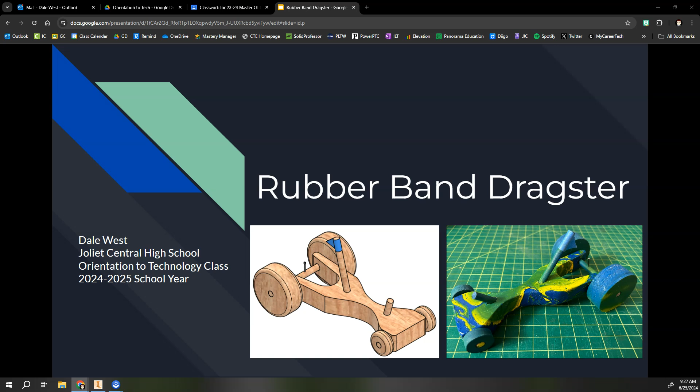So a quick overview to help the viewer know what to expect as they're moving through this screencast. First, I'd like to quickly summarize what the Orientation to Tech class is. This class is geared towards our incoming freshman students to give them a preview of many different vocational classes we have to offer here at Joliet Central High School. These students will have the opportunity to spend roughly 2 or so weeks in classes like photography, engineering and drafting, woods, automotive, computer maintenance and repair, electronics and robotics, metals, and welding.

My goal for this project is to build a rubber band powered dragster out of wood based on computer aided drafting blueprints which I created. I want to use this screencast to show you my project from start to finish, and I will share the skills I've gained, the troubles I faced, the results, and the modifications I had to make along the way. Finally, I will reflect on the project as a whole and share my overall thoughts.

This project first started in the engineering and drafting unit, where I was exposed to computer aided drafting, or CAD for short. I used the CAD software Autodesk Inventor to create a 3D model of the rear and front wheels. We followed a video tutorial to learn how to create 2D geometry and transform it into a 3D shape based on specific dimensions and criteria.

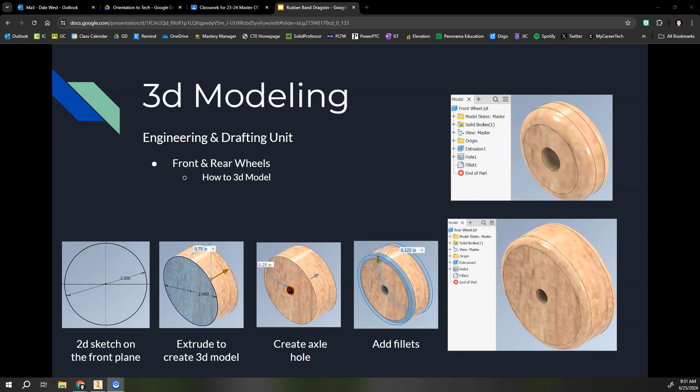From there, we moved into CAD drawings. After we finished that 3D model, we learned the importance of orthographic drawings and how they impact every industry in our world today. Everything we use or interact with today has to start with a detailed drawing before it's actually produced. These drawings make sure the product is meeting the expectations and is accurately manufactured.

I learned that an orthographic drawing typically consists of a front, top, and right side view. In addition to that, you'll typically see a shaded orthographic to help the viewer visualize the 3D object. Here you are seeing the dimension drawing I created of the front and rear wheels for my dragster.

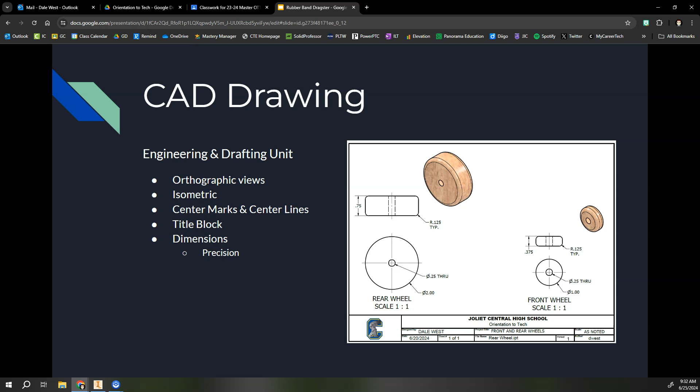I learned what center marks and center lines are for. I learned how to properly fill out the drawing title block. And finally, I learned how to adjust the precision of the dimension and how this can potentially add cost to the manufacturing process for this actual part or parts.

In the woods unit of the OTT course, we started to see the connection between the CAD from that drafting and engineering unit and the physical construction of the rubber band dragster in our woods unit. Here you're seeing me use the body CAD drawing to begin the construction.

I first used a chop saw to cut a 2x6 inch piece out of 3/4 stock. I then cut out the top view of the CAD drawing with scissors and traced the body design on the top of my piece of wood. I also realized why it's important to be able to read a tape measure here, because you really want to make sure that you're meeting the specifications of the CAD drawing.

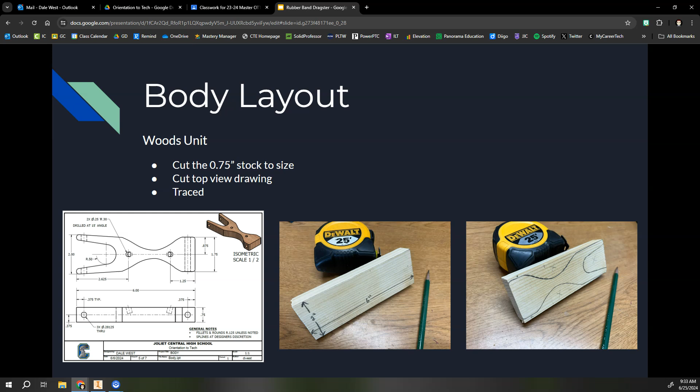Next, I used the bandsaw to begin making relief cuts for the curved portions of the design. This allowed me to easily cut these portions out on the bandsaw, since the blade cannot bend while cutting the curves. If you follow the images from left to right below, you can see the body design begin to develop, moving to the right, and then finally I was left with this.

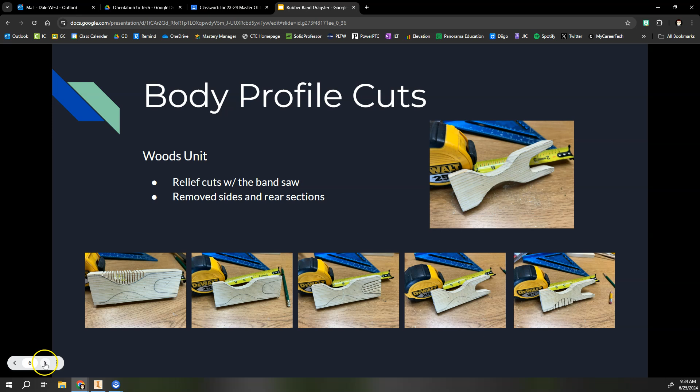Next, I used the paper cutout of the top view CAD drawing and placed it back on top of the wooden body. I then used a pointy object to transfer the center of the flagstaff and the motor pin holes to the top of the body, shown in the far left image on the bottom.

I also learned a little trick along the way, putting some painter's tape at a specific location on the 1/4 inch drill bit. Why did I do that? Because it helps me see how far I'm drilling down into the object and make sure I'm getting the desired depth given to me in that CAD drawing, so I don't go too deep. I then put the drill bit in a hand drill and eyed up a 15-degree angle to drill those two holes in the top of the wood.

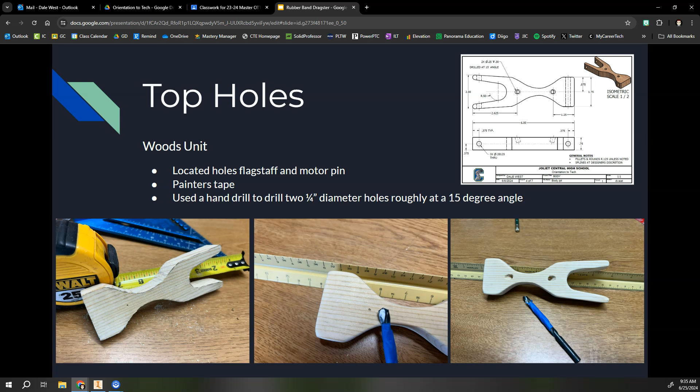Next, I used the front view of the body CAD drawing to help me determine the location and dimensions of the front and rear axle holes. I used this information to create a center mark with a pencil at a specific location to ensure my holes were exactly where they should be and met the CAD drawing specifications. I then used a 9/32 drill bit in a drill press and drilled the holes all the way through the body. I then tested some 1/4 inch axles that I cut to the correct length with a bandsaw, to ensure the wood would spin smoothly.

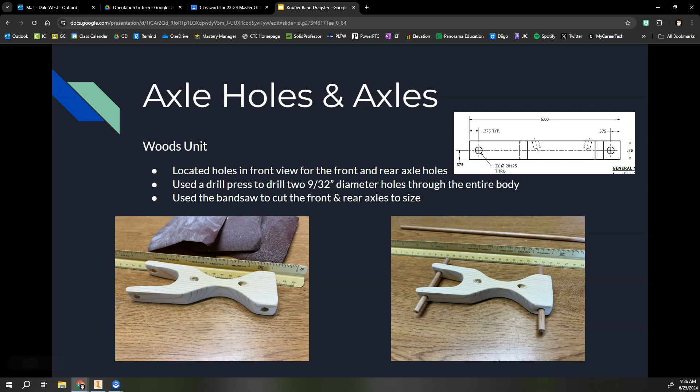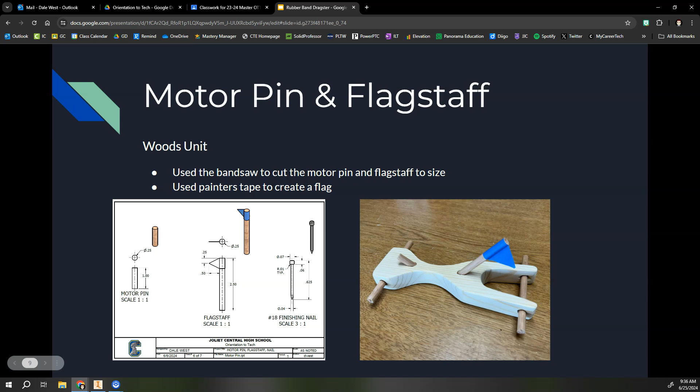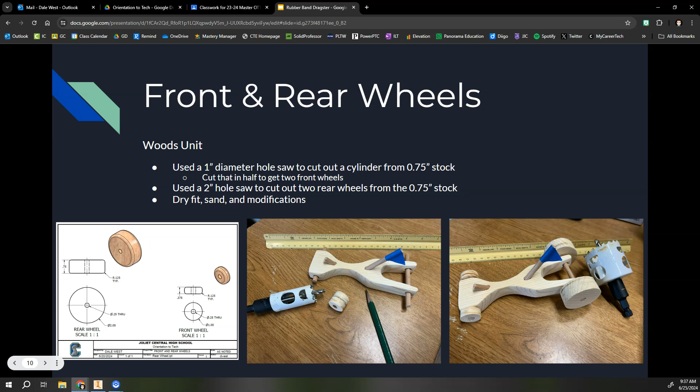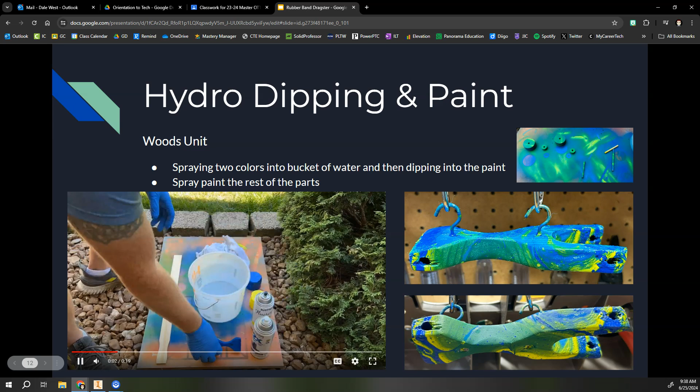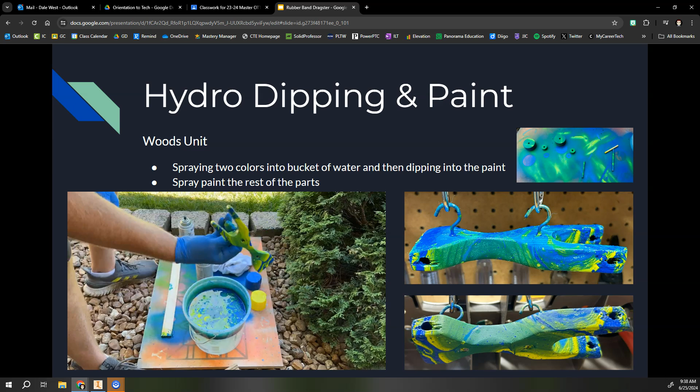Here you're seeing a quick time-lapse video of the hydro dip process, as well as the end results of the body on the right. In the top right, I just ended up spray painting the remaining parts. I did notice that after everything had dried, the parts were a little bit harder to assemble during the dry fit. Overall, I was very pleased with the outcome.

It kind of created this cool tie-dye kind of look. I was trying to get more of our school colors, blue and gold, but I did notice that as those rings started to intersect one another, when you start mixing blue and yellow, you do start to get a little bit of green. But overall, I was very happy with it.

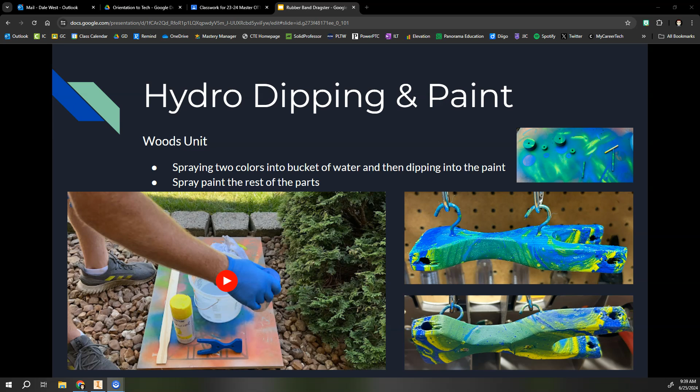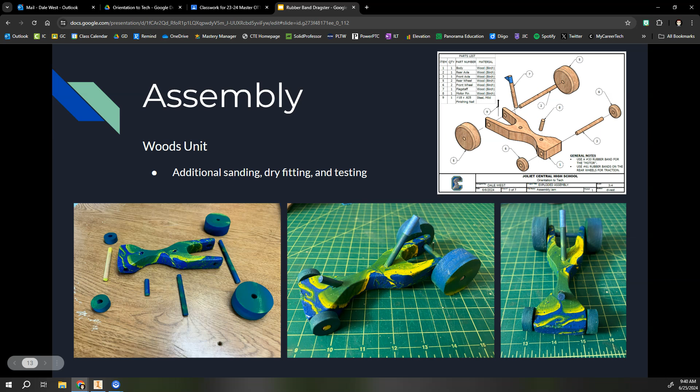I then thought, what type of material are vehicle tires already made out of that we drive around every day? Rubber, right? So what are the materials made out of rubber that I could easily access and make a modification to my dragster? I decided to add some rubber bands on the back tires.

I found that I actually had to wrap a few more strips of electrical tape because the rubber bands were a little small and weren't staying secure onto the rear wheels. By wrapping the electrical tape around a few more times, it made the tires a little bigger in diameter and allowed those rubber bands to fit nice and firmly around the tire.

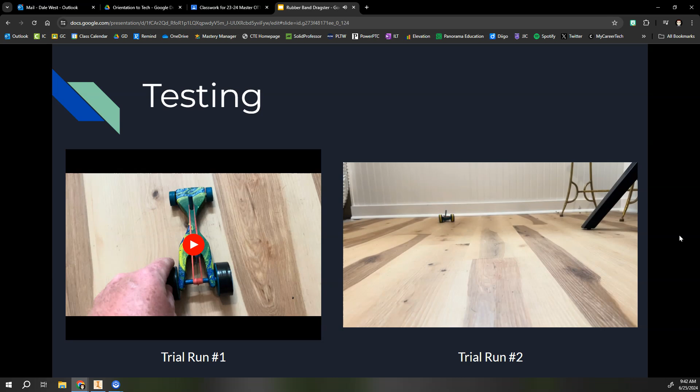And we'll play trial run 2 for you right now. So you see that we're getting a much better result. There is traction and the vehicle is moving forward, which I am much more happy with.

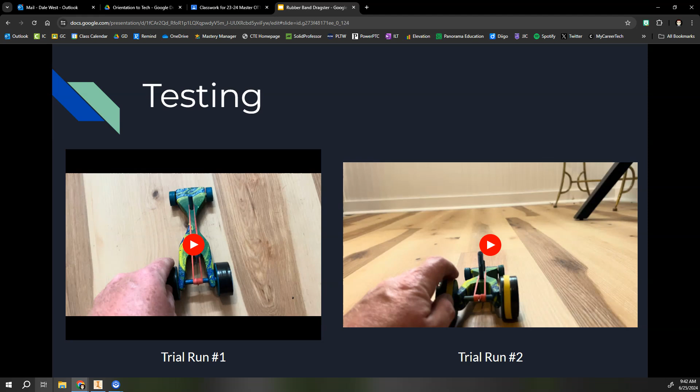In the end, I realized that I had made many different iterations of my dragster due to the modifications I was making along the way. I did additional sanding after the paint due to friction between the parts. I also had to sand a chamfered edge on the front bottom edge of the car due to it rubbing on the ground, as you see in the second image. Finally, I had to modify those back wheels because there was no traction and we just kept doing burnouts.

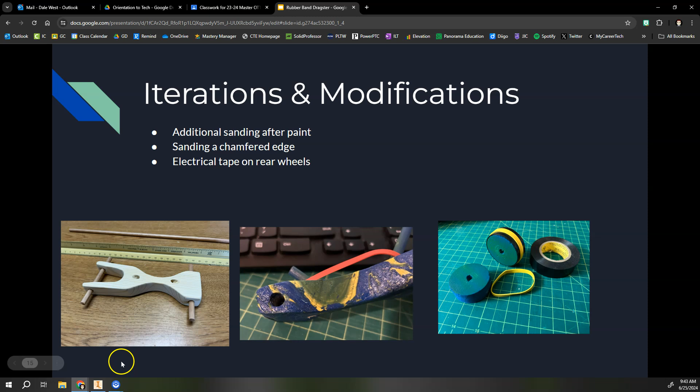The first thing I would do differently is make sure I use a drill press for the axle holes, because they must be perfectly straight or perpendicular to the front view of the body. I think my holes were a little angled due to not being able to use the drill press and having to use a hand drill since I was working from home.

I feel this kind of slowed my dragster down because my holes were a little bit angled and not going perfectly straight through. I should have also drilled those holes prior to cutting the profile of the body, because it would have been a little easier to drill them at that stage in the manufacturing process.

The other change I would have made was to test the hydro dip on a piece of scrap to figure out those problems I may run into ahead of time.

Some of the other things that just kind of came out through the project: the first version wasn't my final version. I think nowadays we're so used to just getting that final answer, that final product right away, that we sometimes have to slow ourselves down and go through that process, because that's where you're really learning how to troubleshoot. And troubleshooting is a really good skill to have in any future career.

Also, something else that came out to me was failing. It's okay to fail, and you should fail, but you want to try and fail often, and fail quickly, so you can get to that final version or final iteration of your design. It's okay to fail and then troubleshoot through it and fix it.

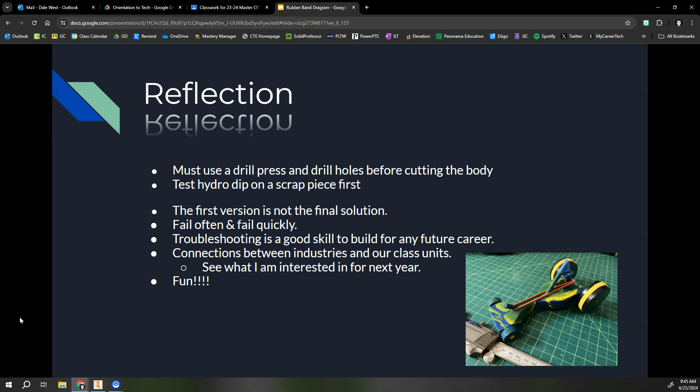It also really helped me guide my decisions for next year: do I want to jump into woods and take that class next year, or do I want to go more on the engineering side and take engineering and architecture 1? Overall, though, the project was fun. I really did enjoy it, and I look forward to our next unit.